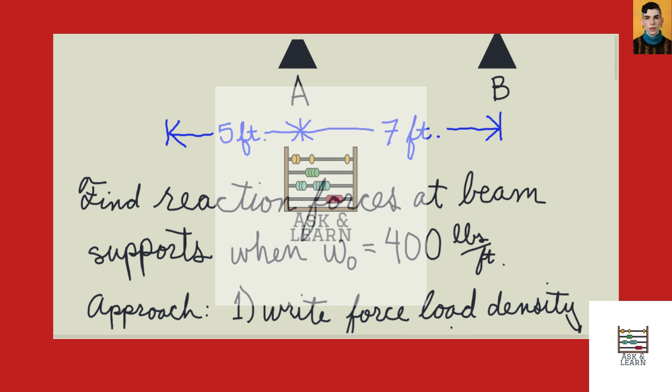We are asked to find the reaction force at supports A and B given their location along the beam at 5 feet from left and 12 feet from left, or a span between them of 7 feet. This problem also gives us the value for W sub naught, our force density value at the extreme left-hand side of the beam: 400 pounds per foot.

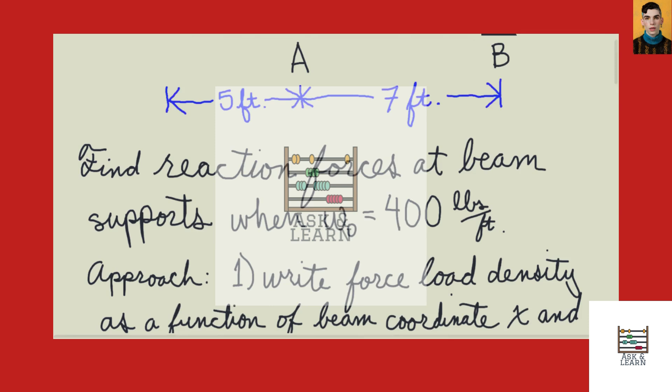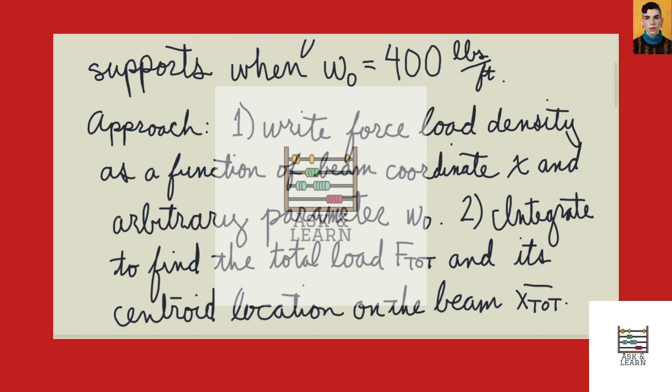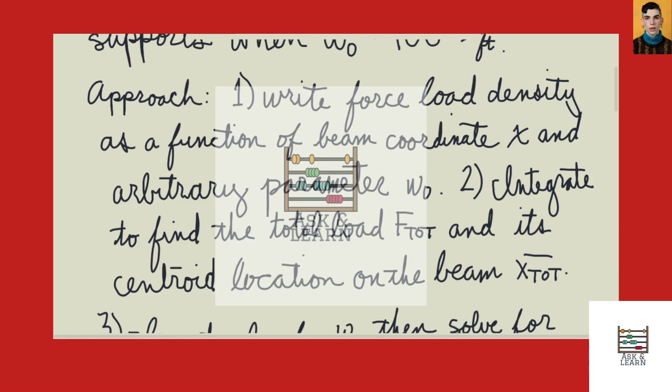The approach we're going to use to solve for these reaction forces at each of the supports is to first write out the load density, this linearly varying relationship, as a function of the beam coordinate x, the span from the leftmost point, in terms of the arbitrary parameter we are given. But it's better to keep it arbitrary as long as we can, so we'll symbolically represent this parameter as W sub naught.

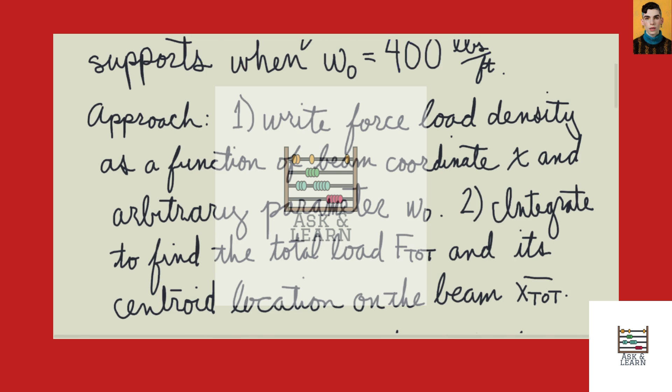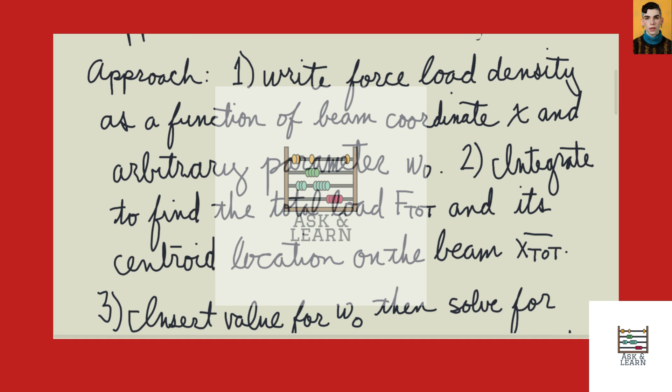Next, we'll integrate that function to find the total load, integrated over the span coordinate x, denoted here as F total. It's going to be pointing downward from the load, and the reaction has to exactly oppose that.

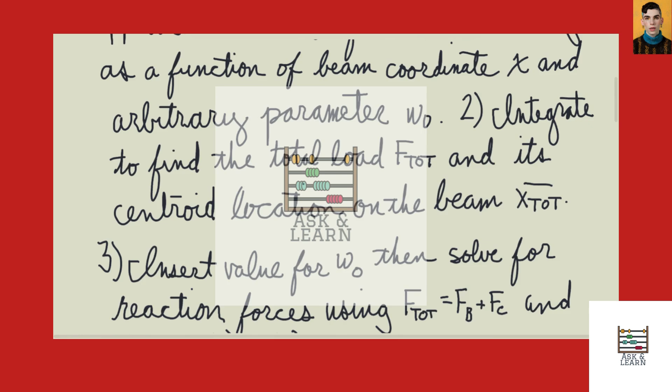We will also calculate the centroid location on the beam using the function we derived in step 1. Finally, we'll insert the specific value we're given of 400 pounds per foot for W naught, and solve for the reaction forces at each of the supports using the usual statics equations.

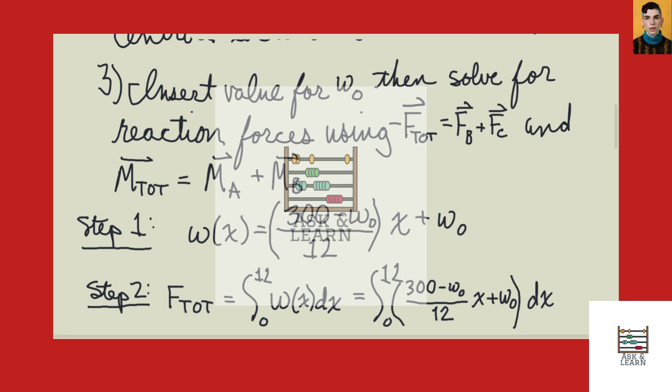If something is static, it cannot move linearly in space, it can't have any translation. So the opposing forces of the supports, the sum of those forces, will exactly cancel the total force of the load. The other thing is, since it's not rotating in space, the torques about the centroid must be equal and opposite, so this total torque is equal to 0.

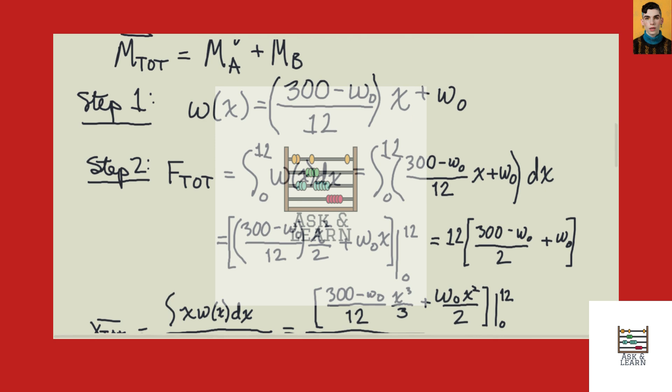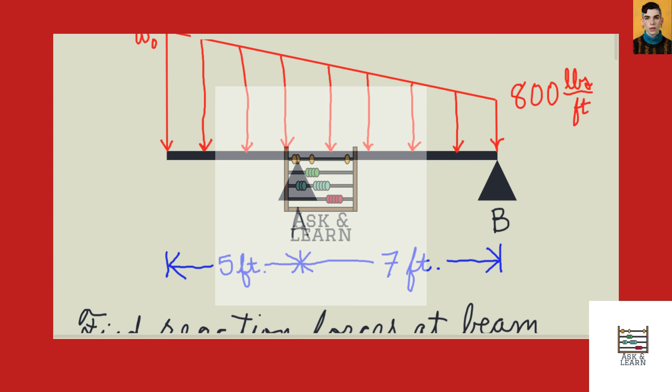So for step 1, we're going to write out an equation for our load density function along the span of x. We have our endpoint at 800 pounds per foot, and our starting point as W sub naught. So we're going to subtract, and that should be set.

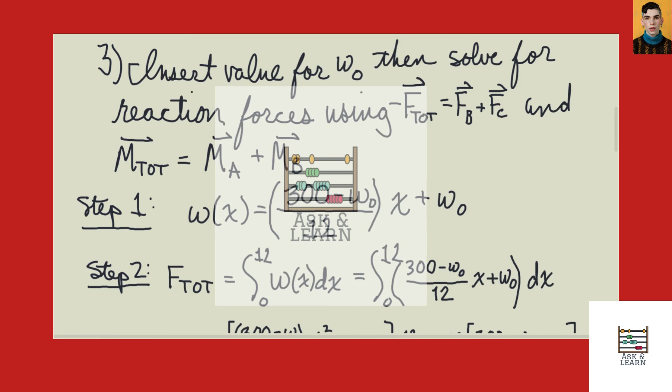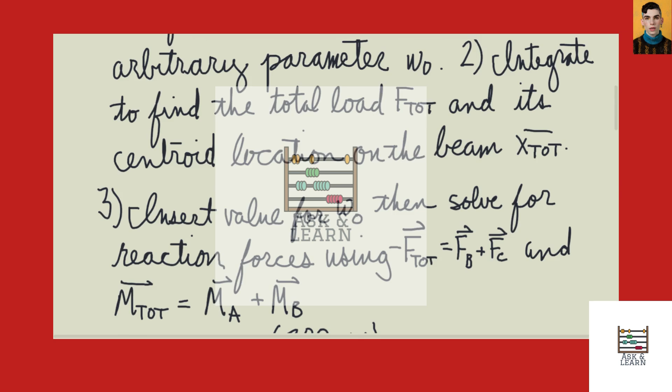My apologies, I just double-checked the problem and I miswrote the value here. It's not 800 pounds per foot, it is 300, as is correctly stated in my equation. Let me fix that real quick, sorry about that.

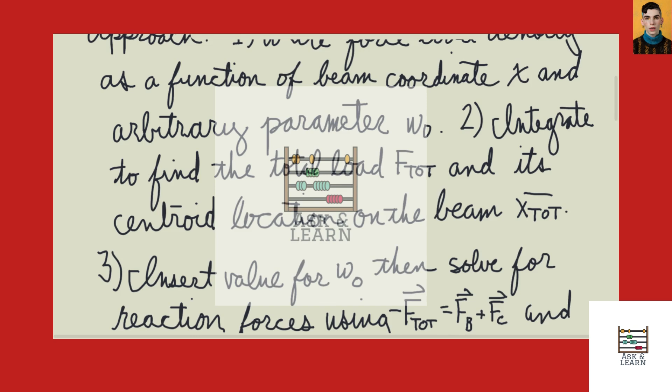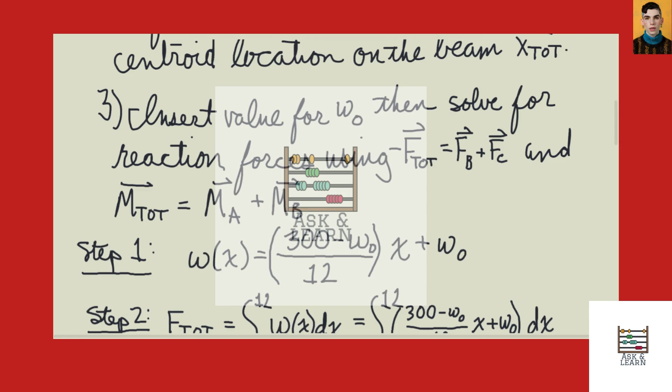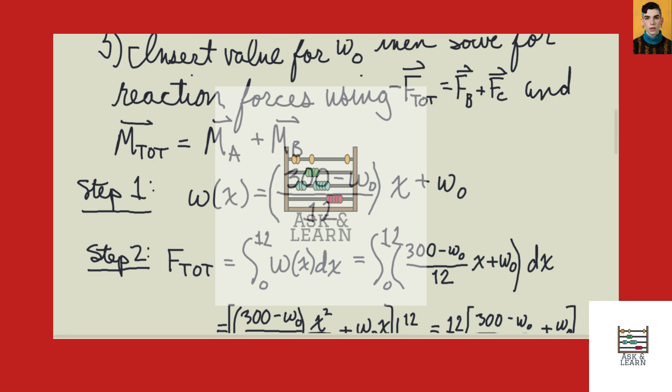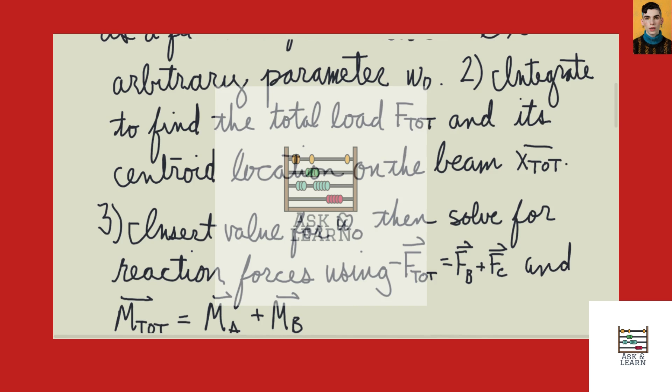Going back to our derivation of the force density equation, we have 300, the y-coordinate at the final location, minus W sub naught, the y-coordinate at the initial location, over a run of 12 feet. That's our slope. For a linear equation, we multiply the slope by our independent variable x, then add the offset at x equals 0, which is given as W sub naught. Thus we have our equation for the load density over the span of x.

Next step is to integrate over the span of x in order to get the total load. So we have our equation just derived above as a function of x times the infinitesimal dx, summed over the span, performing the integration from 0 to 12, the total span of the beam.

Our independent variable x dx goes to x squared over 2, and W sub naught dx goes to W sub naught x. We evaluate from 0 to 12, and we are left with this equation for our total load in terms of W sub naught.

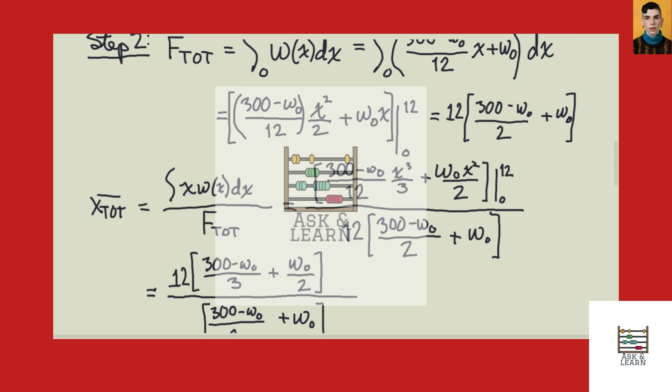Secondly, we can find the centroid by integrating the product of our x coordinate times our force density function, and the infinitesimal dx, performing that integration and evaluating from 0 to 12. I'm sorry, I went too fast there - that numerator, the integration of the product of x w sub x dx, is divided by our total load, which we just calculated in the step above.

So evaluating our numerator, we have 300 minus W sub naught over 12, times x cubed over 3, plus W sub naught x squared over 2. That numerator, both terms evaluated from 0 to 12, divided by our total load relationship below. This can be expressed as follows.

Okay, our step 3, we will use those two equations from statics: forces must sum to the total load, the reaction forces that is, and the torques must sum to 0.

The magnitude of the total load, by plugging in a W sub naught of 400 pounds per foot into this equation here, you should get 4,200 pounds for our total load.

We also know that it's not rotating in space, so the opposing torques must exactly cancel each other, and that should equal 0. So we can work out the torques about the centroid at support B as follows.

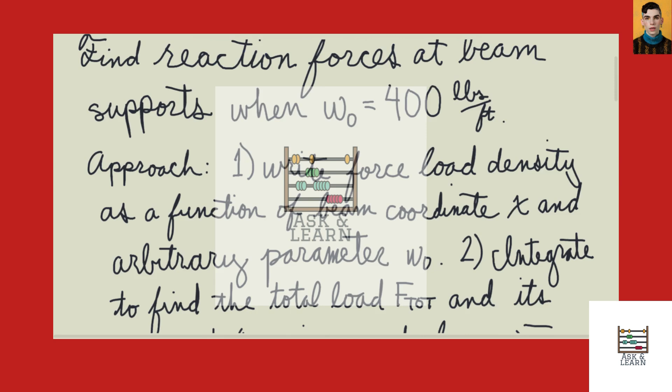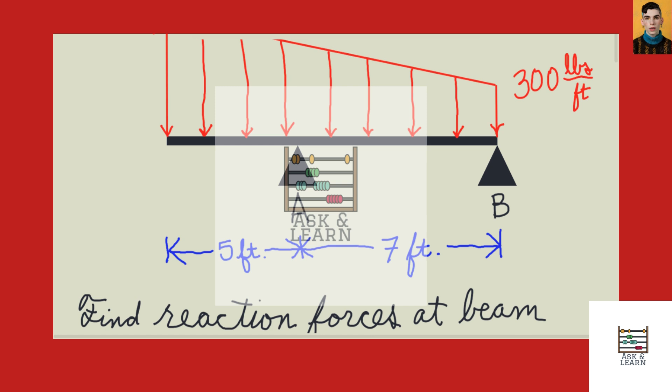Looking back at our diagram here, wherever the centroid is, x sub total, the moment arm about it will be its location, x total, minus the location of support A, which is 5 feet. Or rather, the other way around, 5 feet minus the location of x total.

Because we don't really know yet where this centroid lies, I'm going to make my life much easier with sign conventions and just multiply the force at FB by the absolute value of that moment arm. I'm going to call the direction of that force negative. So that's our first term, the torque about the centroid exerted by reaction force B.

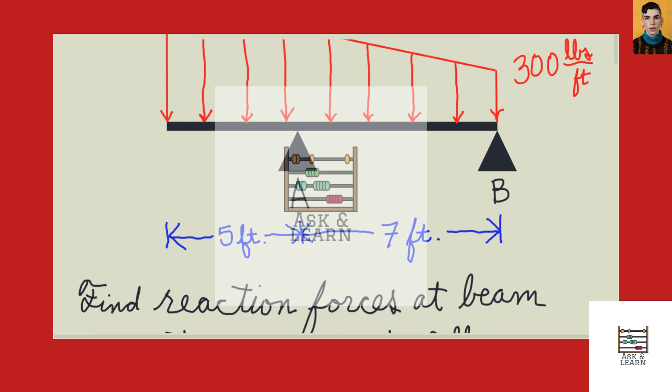We do the same thing for reaction force C. It's located at 12 feet from extreme left. We have that 12 feet, and you subtract the location of the centroid, of which we don't yet know, so we'll keep it symbolically. That moment arm will be 12 minus x total, the location of the centroid. We take its absolute value for that moment arm and say that torque is in the positive direction.

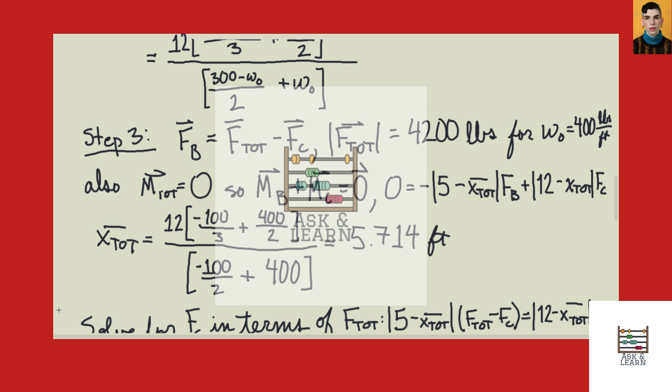Here we are, sorry, cursor's in the wrong place. That moment arm times the reaction force at support C is expressed as follows. Those two torques are equal and opposing.

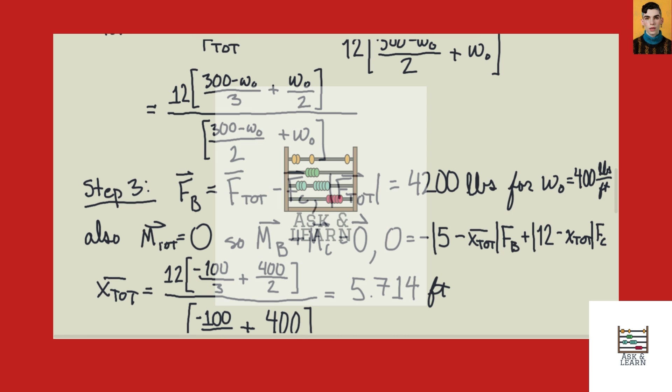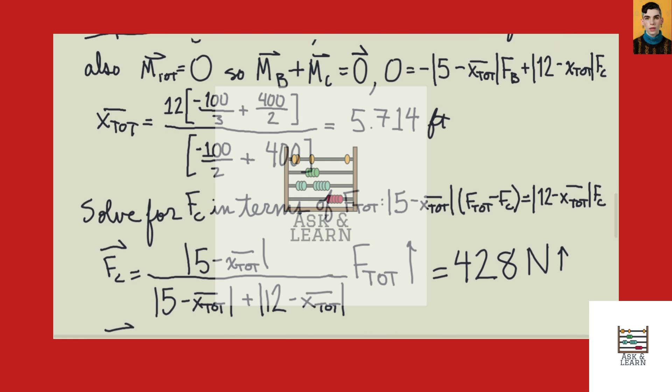So given the sum of the forces and the sum of the torques, we can solve now for the location of our centroid as well as the reaction forces.

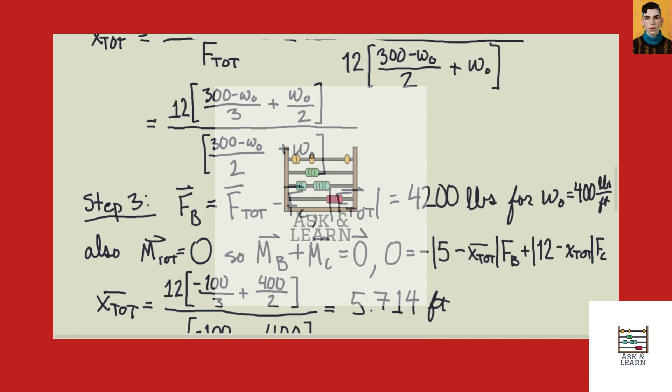So we can find the value of the centroid by plugging in W sub naught equals 400. We do that in this equation here for x total, and we find that it works out to 5.714 feet. That would lie very close to this B support, probably in the neighborhood about right here.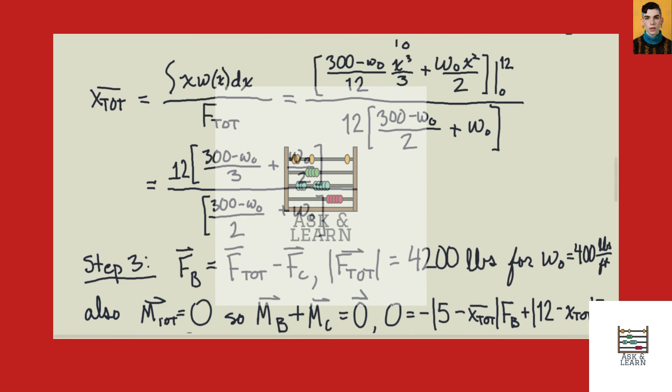Now that we have a numerical value for the location of our centroid, we can plug that into our sum of torques equation here, which I'm going to underline because it's a very important equation for this problem. So we want to draw our attention back to that.

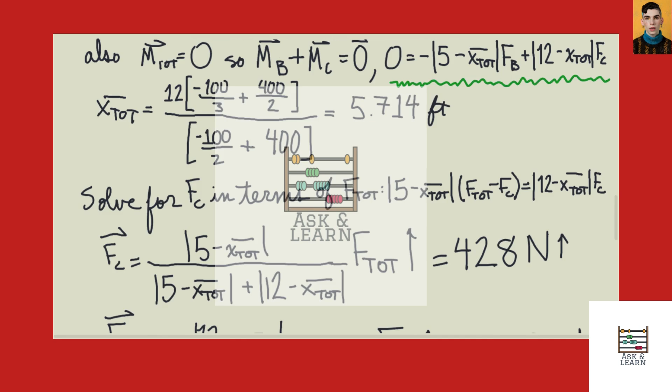Given this, and given that we now know the location of the centroid, we can use these two equations to solve for both FC and FB, depending upon which one we subtract from and insert into our torque equation.

Here I've solved for FC, and it comes out as follows: the value of the difference between the location of support B, which is at 5, minus the centroid, and that's divided by this denominator, which is the sum of the two moment arms about the centroid.

That works out to, and that entire proportion is multiplied by the total load, and it's going to go in the opposite direction of the total load. So right now, to keep track of things, I'm going to put an upward arrow because the total load was pointing downward. Our forces must be in opposite directions.

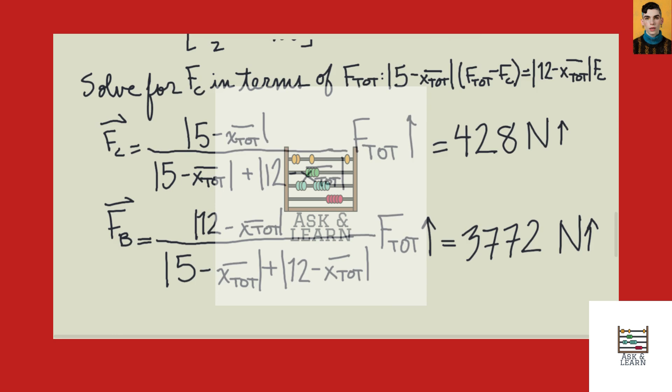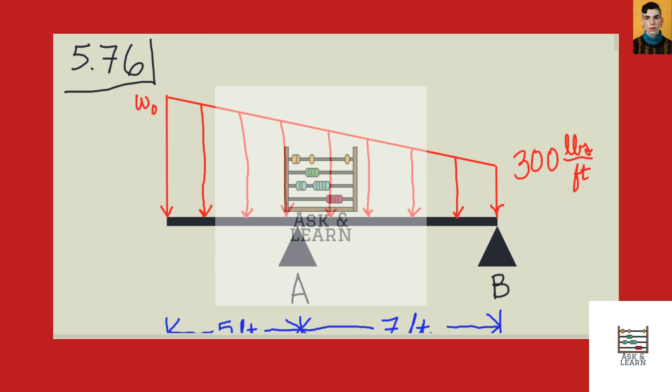Working out those numbers, we have 428 newtons in the upward direction for the reaction force at support C. We expect that to be a lot smaller than the total load because if the centroid's here, the torque is exerted across a long moment arm, so the force doesn't have to be as great to oppose a force that is close to the centroid, a short moment arm here.

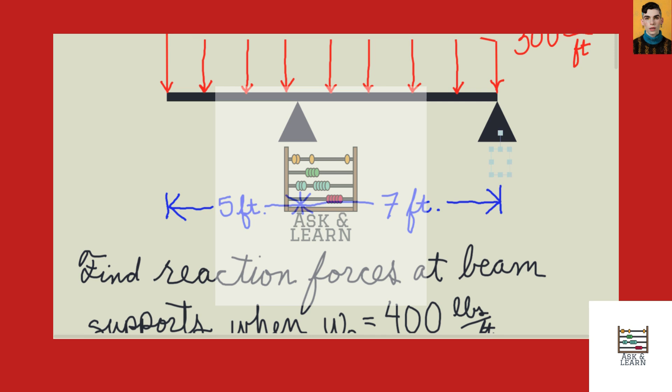Apologies, but I used the wrong values here for the supports. Let's fix that while we can. These should be B. This should be C. My apologies again, I see that I made the same mistake here. Let's put these properly — that was the torque about support B and the torque about support C.

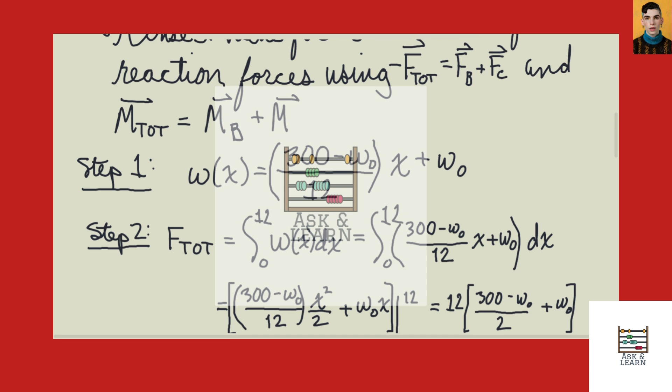Okay, back to where we were.

Likewise, the reaction force at support B has the same denominator, but the numerator is now the other portion of the span, the longer moment arm of the two, in the numerator times the same denominator, which is the sum of the two moment arms, times that whole proportion times the magnitude of the total load.

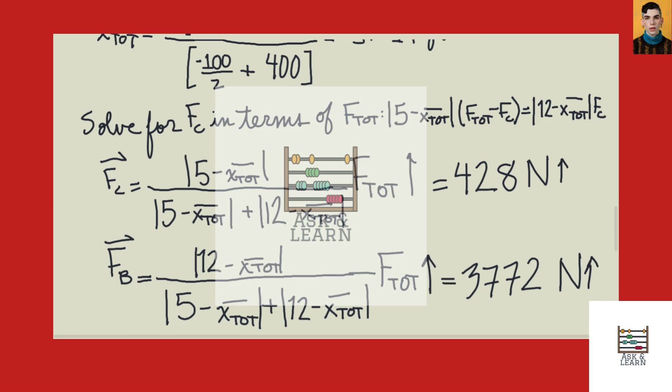The direction of the reaction force will be upward. You plug in the numbers for that — remember, our value for x total was 5.714 feet. Plug in the numbers for our centroid location there, and you should get 3,772 newtons upward.

And that concludes our problem. Let me box it. There we go.